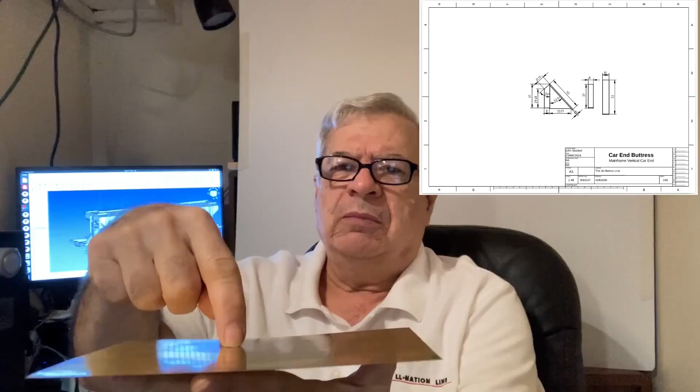Sometimes you'll find just sheet brass that you can use, and something like this is very handy because when you start creating the parts and 3D printing them from your digital model, take for instance the buttress of a car end, you can lay that on the brass, put some bluing on your brass, and take your scribe and actually scribe line work in there where you need to cut.

Now, some of the brass that you're going to get is going to come in rolls or sheets like this. You find these out on eBay. Here's a much larger roll, wider width. This was about, I don't know, 100 inches long. It's a good starting point if you're going to create the sides of this particular car.

So what you'll need is probably some tin snips, because very likely you're not going to have a shear to be able to make the cuts. I'm just lucky enough to have a shear in the shop here. It makes life a little easier. And you're going to want to be sure that when you scribe, to double check your measurements and make sure things are square.

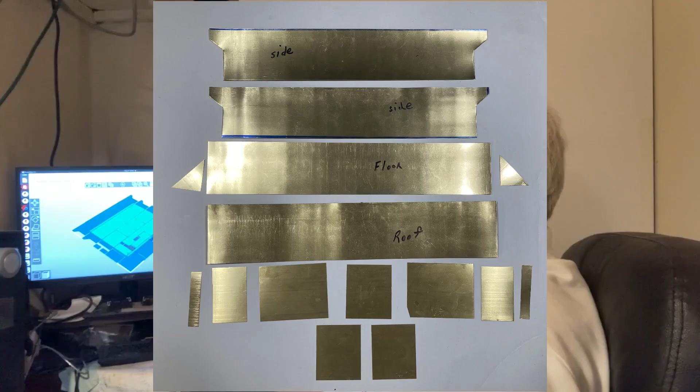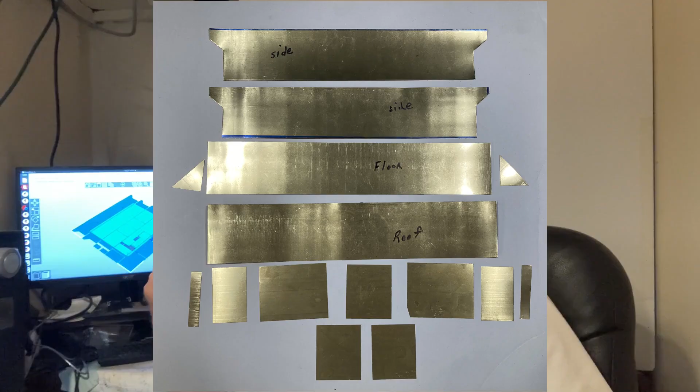So, what is the purpose of a digital replica? Well, the first thing you can do is lay out your basic parts. And you can do that right here from your CAD program by showing what the sides look like. You can basically see the ends, the slope ends, the vertical ends, the floor, the roof, and you'll have a very good idea what you'll be encountering when you want to just make the basic parts to get you started. Don't worry about the detail, that comes later.

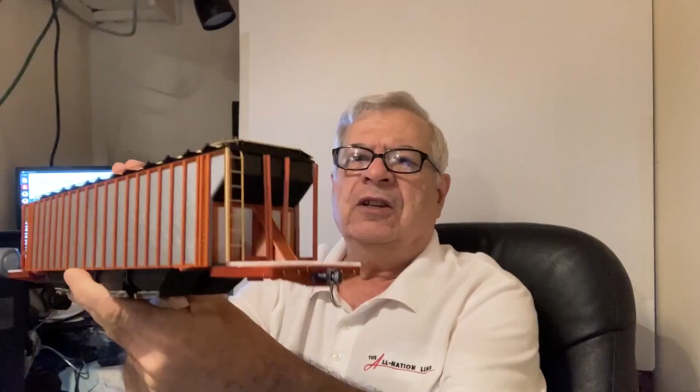So what is handy about having the plastic parts from 3D printing is once you have them cut out and ready to a certain extent to start assembling, you will find that you want to start creating your digital replica. And this digital replica, there's no need to go any further than this.

You don't need to detail the replica. You're just trying to get the basic superstructure and make sure such things as your ribs across the side of your car are spaced correctly.

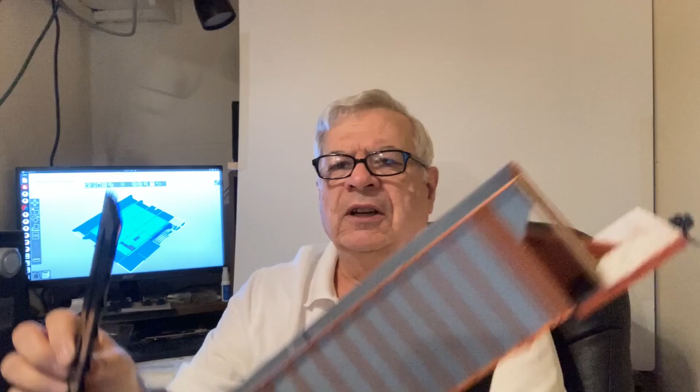The roof profile, you would want to check and make sure where your roof ribs fall, where your hopper bay openings will be on your roof, where your partitions are in the car, and of course this gives you an option as to whether or not you want the roof to come off if you're going to do a little detail work inside the car.

You want to get a real good idea on the underside, and that is your channel and framing, where your bolsters end up. And of course this is a very large car and requires trucks that have 6 wheels on each truck on 3 axles, and those trucks were originally made by American Steel Foundries.

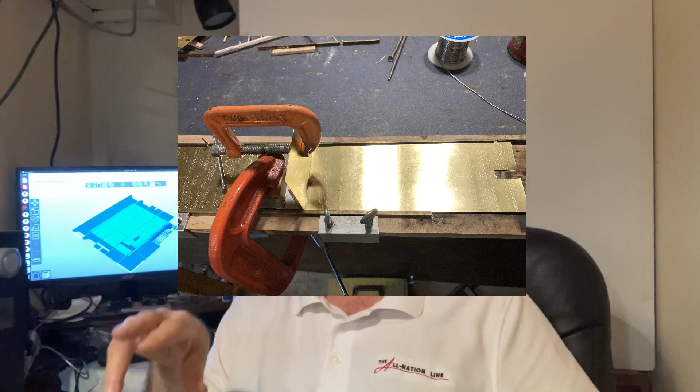So this is a mock-up that's pretty far along, and there's an opportunity at that stage as you develop using the plastic mock-up parts from your 3D printing to think about order of process, order of assembly of parts, and you'll discover there's more optimal ways to do it before you start soldering things up in brass or gluing up your styrene model or your cardstock model if you're going to go that route.

So what we've decided to do to help modelers make the transition from just simply building kits to entering into the realm of scratch building is to provide a kit with all of the parts from 3D printing this digital twin and jumpstart the process of your scratch building project on this model.

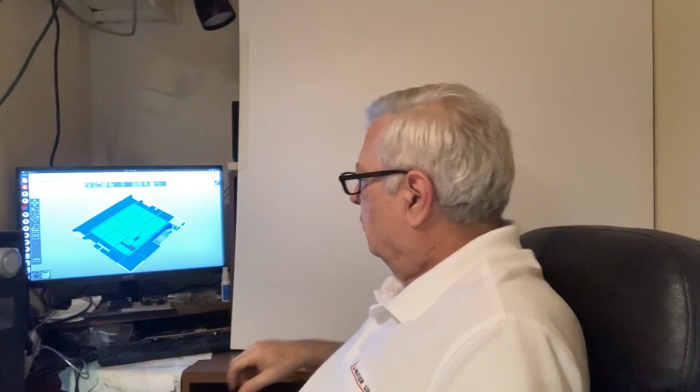We'll provide the detailed drawings of the digital model, and we'll have, of course, screenshots of this particular car so that you have points of reference when you go to work toward assembling the various components. The detail that you will add will come later.

And you do need to be thinking about various things like thicknesses. So when you go to make your buttresses, for example, for the car ends, there's probably more than one way to skin a cat when you're working in brass to make those and soldering them up.

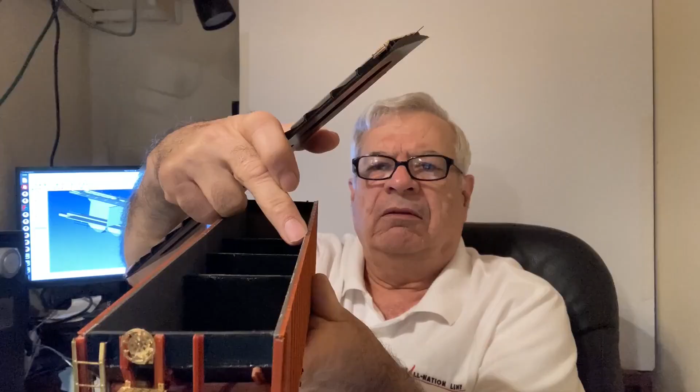You will note that on the parts that we'll supply, whether they're just ribs or the rib cutouts on the side, our wall thicknesses on the mock-up are about 1.25 millimeters in thickness. Well, your brass is going to be a lot thinner, and so while this is approximately 64 millimeters in width, it will be slightly less, of course. So there's that component to think about.

So when we did the mapping of the actual model to two-dimensional blueprints, which we'll provide with the kit, you'll notice that maybe some of the metrics are not perfectly accurate, which may be a function of this software's ability to map from three-dimensional to two-dimensional. And I have it set up where it rounds the number, doesn't take it out to 5 digits. Really not that necessary.

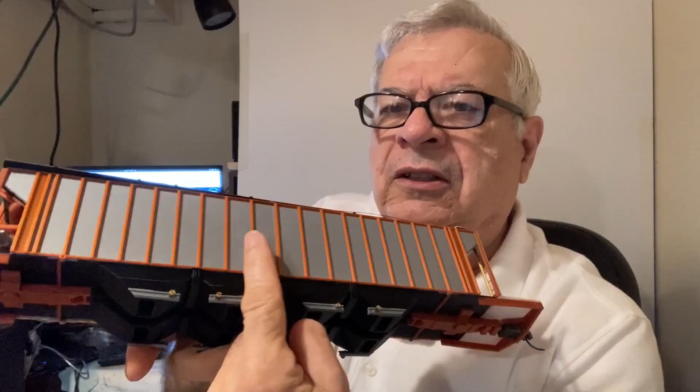But when you get the parts, you'll notice very subtle things like the distance of the ribs is a little wider as they go across here between the two middle hopper bays. It's hard to see, but we had to account for that based on drawings that we had and photographs, and there's plenty of photographic references out on the internet for a modeler to look at and to really get into the detail once you're done.

Now with this kit, even if the modeler doesn't want to scratch build using these parts, you can put a fully developed model together just from the parts that we have in the kit and go ahead and finish it out as a plastic model. It's very close to what the prototype was, and you'll have to be thinking about how you want to paint the model.

And again, this is where the mock-up comes in handy, I think, because you may decide to change the order of your superstructure construction or assembly process to accommodate priming perhaps, or painting.

I hope you enjoyed this video, and perhaps as we talk more about this car in the future, especially with other model builders, we'll have some tips and tricks for developing this and show you maybe even some shortcuts, because we learn from a digital twin.